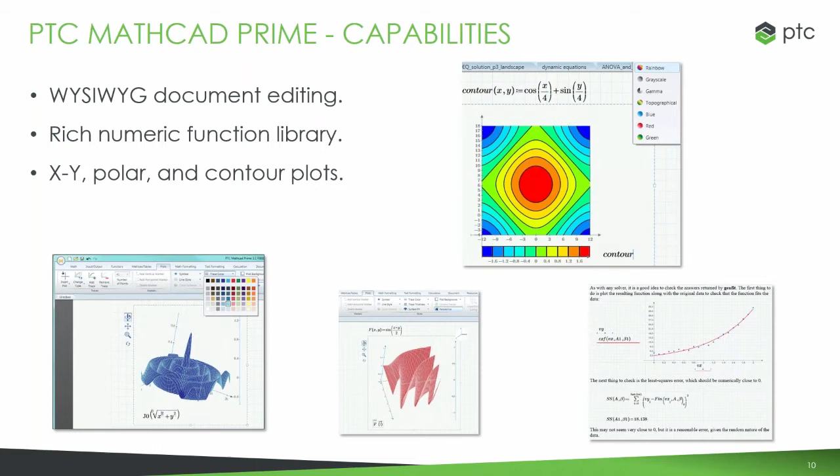Okay, so another huge capability of Mathcad is how it can be integrated with Creo Parametric. That means you can take values from Creo Parametric, so the dimensions, anything you want to bring over, you can push that into Mathcad. And then in Mathcad, you can do some calculations, figure out a different dimension, and then push your new value for a different part of the equipment maybe, or a dimension next to the one you brought over originally. So you can solve out for the new one in Mathcad and push it back into Creo to use for a different dimension.

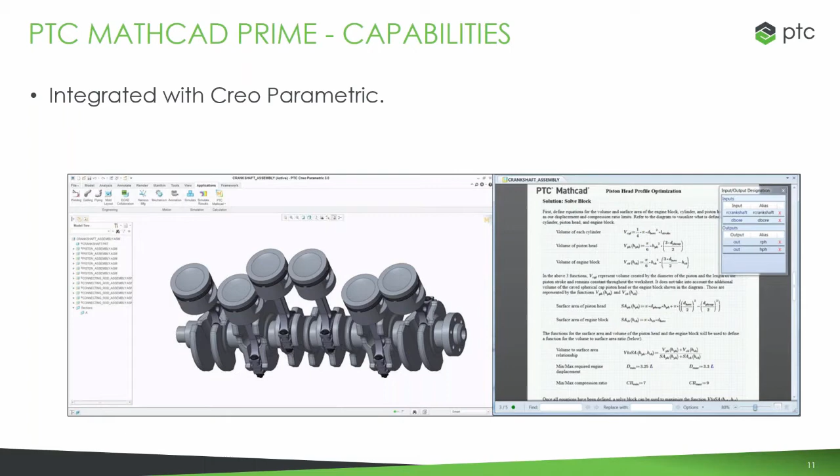And while you're doing all this hard work together in Creo and Mathcad, you can be documenting your design intent. You're not just limited to calculations in Mathcad. It's going to have that strong documenting capability for you, so there will be no confusion about what your intent is. And while you're figuring out what dimensions are looking the best, you can do analysis to make sure that whatever you're doing is going to fit in with your design requirements in the end. So you don't have to wait until the end to do all the calculations to make sure your product is going to fit within your requirements. You can validate and verify while you're walking through it.

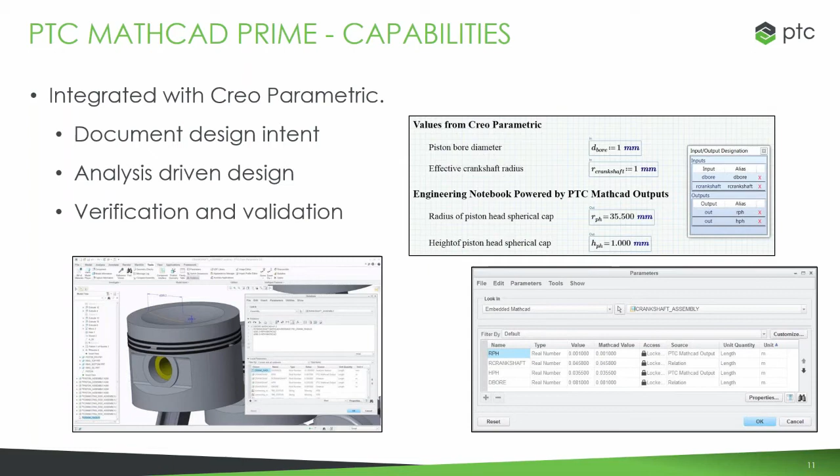Now I'll walk us through a quick demonstration of Mathcad where we are going to look at a couple different ways we can incorporate Excel. I am going to start us off here with a blank one. We'll just look quickly, and I do have one started here. So we're going to be making some updates to this workbook to really show off how Mathcad can help you with your engineering process.

So you see here, it's the same looking ribbon as it looks like in Excel or Word, so we're able to go ahead and update this text to show however we want it to. So we go ahead and bold things. We can toggle off this grid in the background. So we make it whatever standards that you want to upkeep or whatever look you're going for, you can incorporate that.

Okay, so we're going to start off here looking at some beam properties, and this whole document is going to be about this beam deflection. So we're really going to be diving into this beam here. So first, we take a look at the cross-section of the beam. This diagram here was built in PowerPoint. I love making diagrams in PowerPoint. I find it's very easy, simple, something that I do a lot.

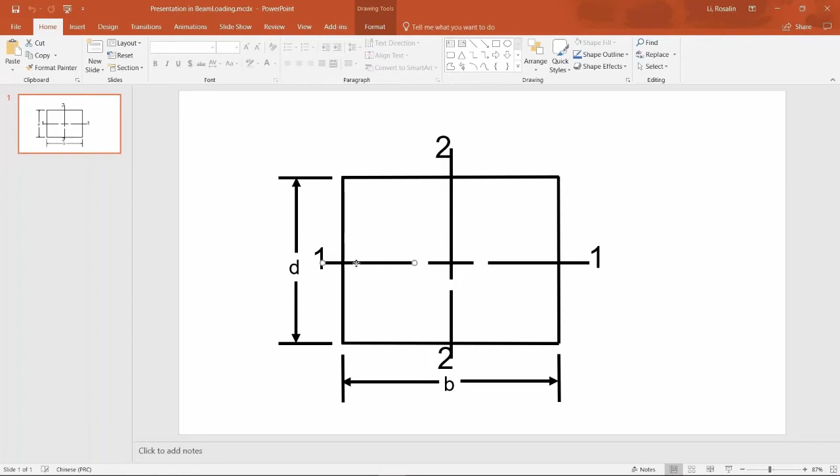So we have this PowerPoint diagram here, and what I can do is double-click on it, and it's going to open PowerPoint for me. So that means I'm not sitting here looking through my computer to find this presentation that I made this diagram in. I'm just double clicking on it in my Mathcad workbook, and it's going to open up automatically for me. So we're going to see this later where I can do the same thing in Excel. So we'll go ahead and make a couple of changes here, change this to a yellow or peaches color.

This is different from the regular diagram in the background, highlighting my cross section here. As you see, I closed out of the PowerPoint and it automatically updated for me. I didn't have to save the PowerPoint then upload Mathcad again, it automatically did that whole process for me.

What I'm going to do now is make a few variables, B and D. As you see, I'm not doing any coding here, I'm just saying B equals and D equals. It's something anyone can sit down and read. And then I'll go ahead and solve out for I here.

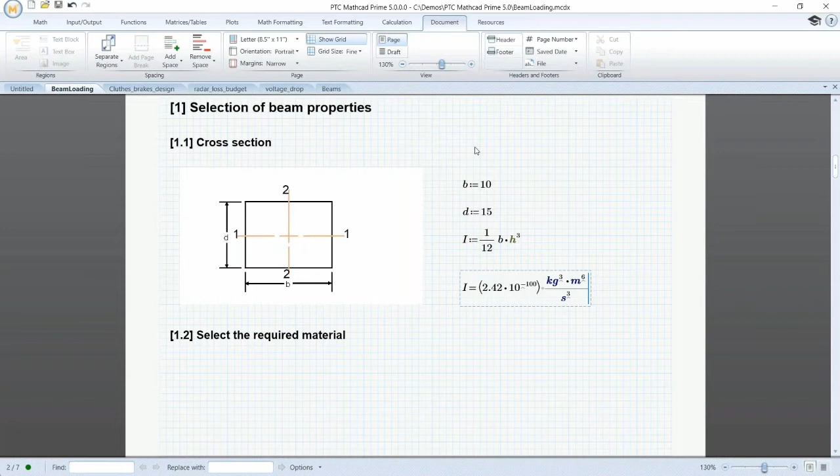Let's say I accidentally type in H, which is not at all the variable I wanted to use. When I go ahead and ask Mathcad what I is, it has all these variables attached to it. I can check myself here since I didn't have any units incorporated yet, so I wonder what did I do wrong here. I can go ahead and ask Mathcad what H is, and see where all these units came from. It's because I accidentally plugged in H, Planck's constant. So that's also showing that Mathcad has a lot of these predefined variables within it as well.

I can go ahead and change H to what I meant to say, D, and Mathcad will automatically update for me. I can also attach some units to B and D, just typing in cm, it knows it's centimeters, and Mathcad will automatically push out meters. I can change that very easily by just changing that M to centimeters, and it'll change the value of I for me, moving the decimal place the correct amount over to whatever the value needs to be now.

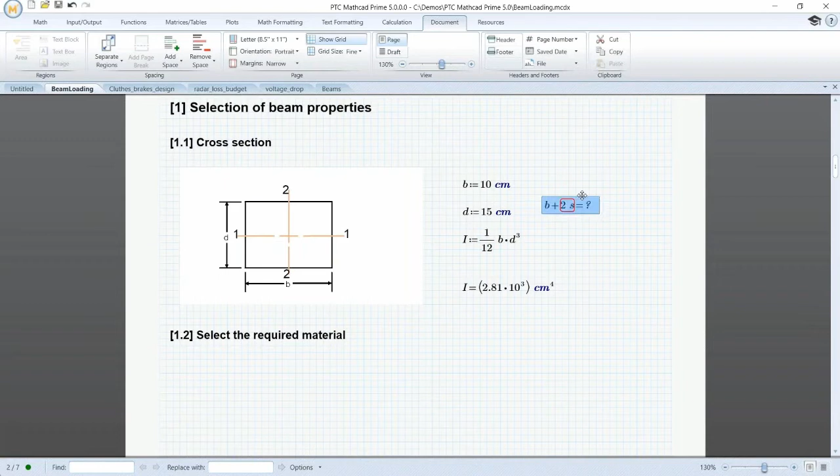What Mathcad also does for me is it won't allow me to add incompatible units. So we see here that I'm trying to add centimeters, the unit of B, to seconds, and it's letting me know that's not possible, maybe you need to go ahead and double check there. So it's going to convert those units for you whenever you're multiplying and dividing, and make sure they're compatible whenever you're doing other operations.

Here we're going to go ahead and read straight into an Excel workbook. There's a lot of work you might have done within Excel workbooks that have all of that data. That's a perfect place to go ahead and dump all of the values you need into a chart that is easily readable, that you don't want to retype within Mathcad. You want to be able to reuse all of those Excel workbooks that you have.

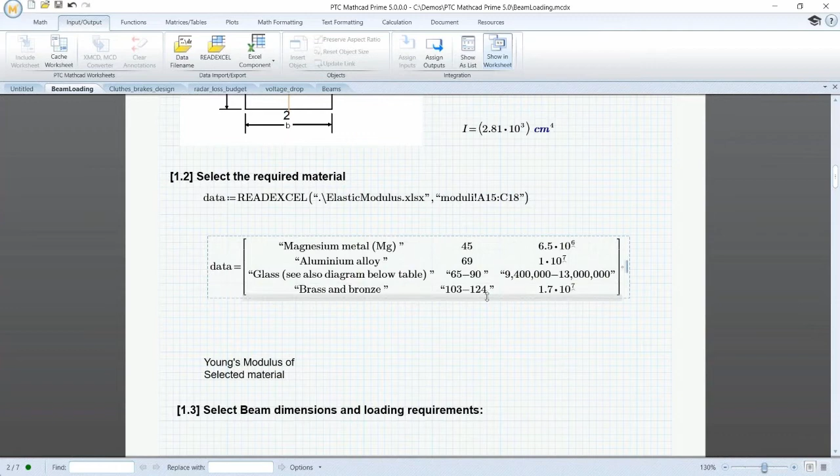So what we can do is a read Excel function, and you see it's big and bright there in the ribbon, easy to find. We can go ahead and pick the rows and columns we want to read into our Mathcad workbook, so we just picked 4 here, of course you could read in much more. Mathcad allows me to set that as a variable, so it's letting me use the Excel data I'm bringing in. It's not just a screen capture or a picture of those Excel values, it's actually reading in and bringing in live those Excel values for me to do calculation work or unit conversions for whatever I want to do.

So again, I set that Excel rows and columns to a variable data, and then I go ahead and ask Mathcad what data is, and it reads me out these 4 rows here. Say I accidentally read in the wrong ones, I can go ahead and update that, and Mathcad will bring in the new rows and columns I told it to. We'll go ahead and do just a quick calculation here where I'm going to use matrix notation to read out one variable, one number, and do a unit conversion with that.

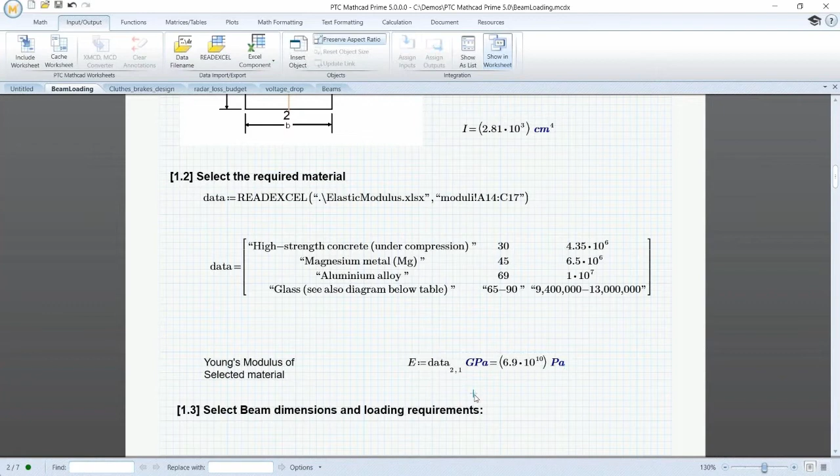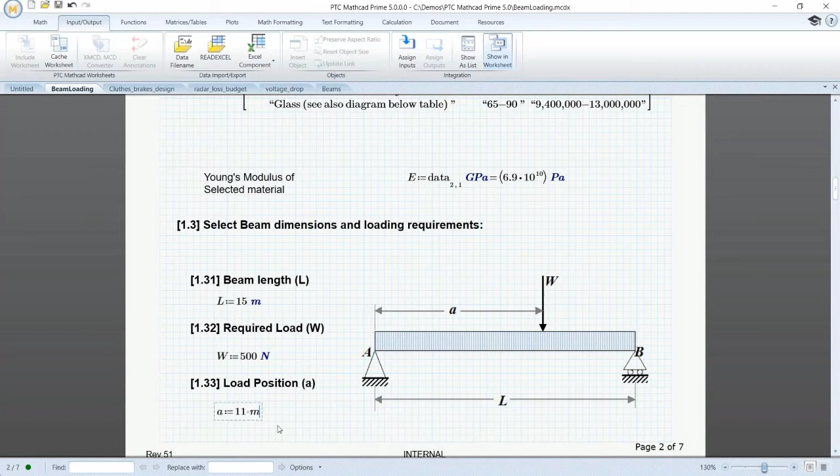What I'm going to do here is define these variables right next to the diagram, so I'm able to have combined diagrams and words right next to the math and setting variables that I need. You're able to have all of this, and you could have made this drawing in PowerPoint as a container where you can go ahead and edit it. But we're combining these diagrams right along with the math that we need.

We can go ahead and do some different calculations, or just some equations set up here with the variables that we set up above.

Okay, so what I'm going to show here is a capability of being able to lock areas. Mathcad has had this capability for a while of making collapsible areas. What's new is that you're able to lock and protect areas.

So we can go ahead and password protect that area. What that means is that people either won't be able to see it if you collapse it, or they won't be able to change anything within that area. So we can make that area password protected, where people will be able to see it, but they won't be able to change it.

That could be really important if you're sending this document out to someone and you want to make sure that they leave one area untouched, that you know for certain this is what you need it to be. Please don't change anything. So you can have that password protected, making sure it's not going to be edited or changed later on.

And then we can go ahead and do a calculation out with those variables we set up earlier right next to that diagram. We can ask what that deflection is at L/2. And again, it pops up in meters. Easy to change into millimeters just by changing that M to mm.

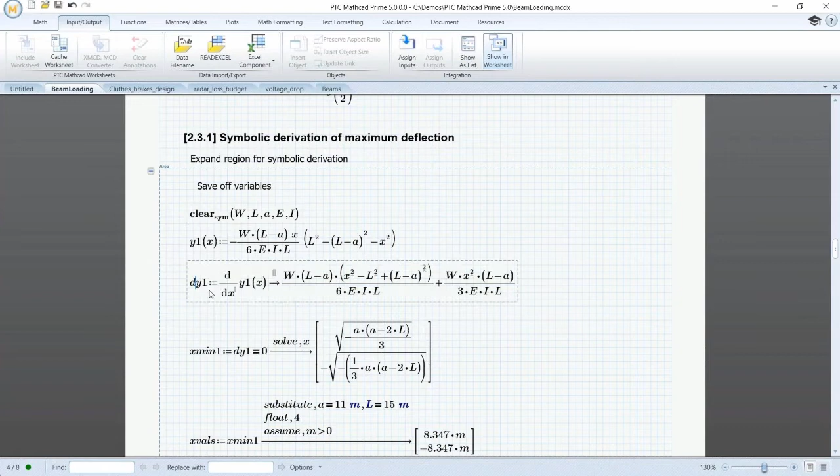And you might not want everyone who you're giving this document to get lost in this derivation. So you can just collapse this area. You can have it visible for anyone who wants to do a deeper dive. But if you don't want someone to get bogged down in those details, you can just collapse it and not have it be a part of your main flow.

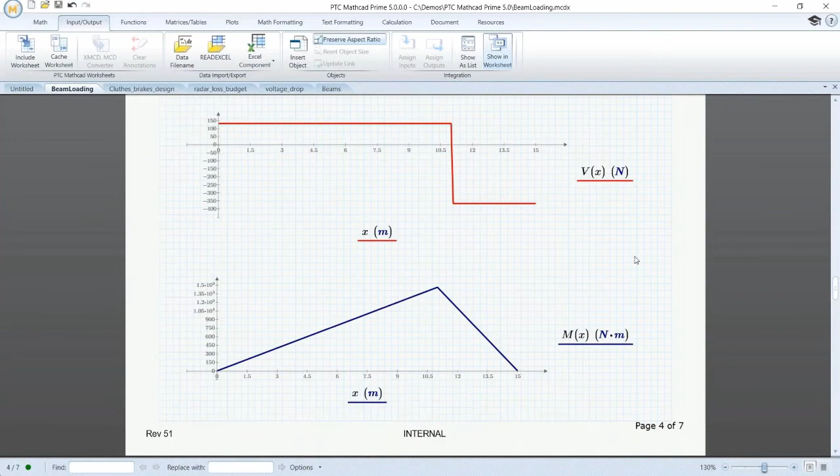Again, we're just going to go ahead and change these units over here, just showing how easy it is to go ahead and convert those, and you're not having to worry about how many decimal places to move it over. All right, so just scrolling through some 2D plots, we'll get into more details on one of those later.

Here is the second way that we can really use Excel. So earlier we took a look at how you can do a read Excel function, which brings in those rows and columns and the values within them live, pulling it in for you to do calculations out with it. This is a way that you can reuse any charts of data that you have.

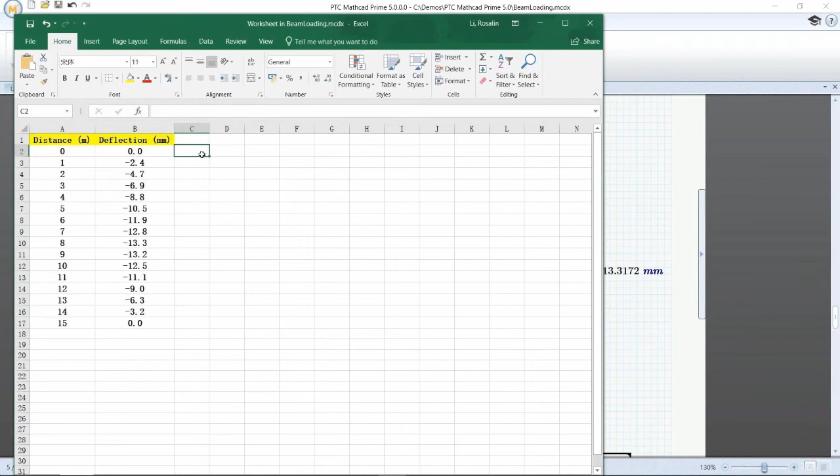So what we can do, this is the same thing we did with PowerPoint earlier, is that we can go ahead and highlight the headings there. We can bold it and center it. And again, we're not searching through our computer to find that Excel document. I don't have to remember when I made it or what folder I put it in. I double click, it opens for me. So that is a perfect way to use Excel.

It's called a container. So I can go ahead and put it in its own container, double click on it, open it up, do all that good editing work that you can do in Excel, and reuse it, reincorporate it into your Mathcad workbook here.

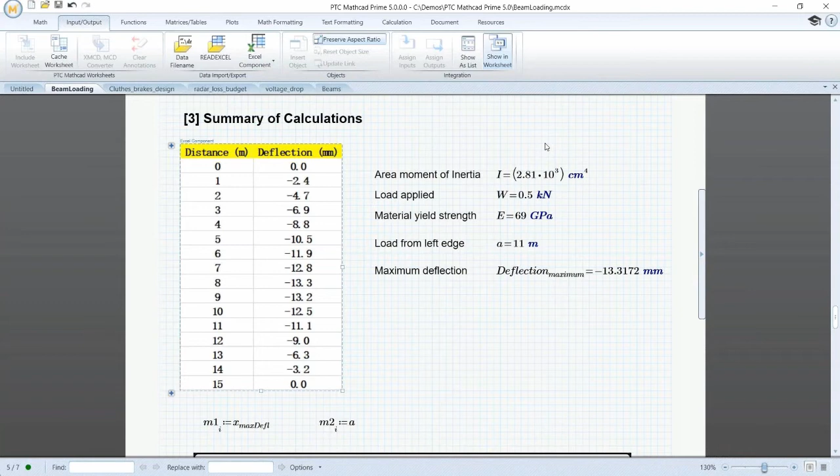Okay, so we went ahead, updated it, closed out Excel, and it automatically updated for me in Mathcad. Again, we have math right next to that component there.

We're going to take a closer look here at 2D graphs. So Excel gives you a lot of options to go ahead and edit your graphs, and now Mathcad can do that as well. We can go ahead and add in a background to really highlight where the chart area is versus where all the axis titles are.

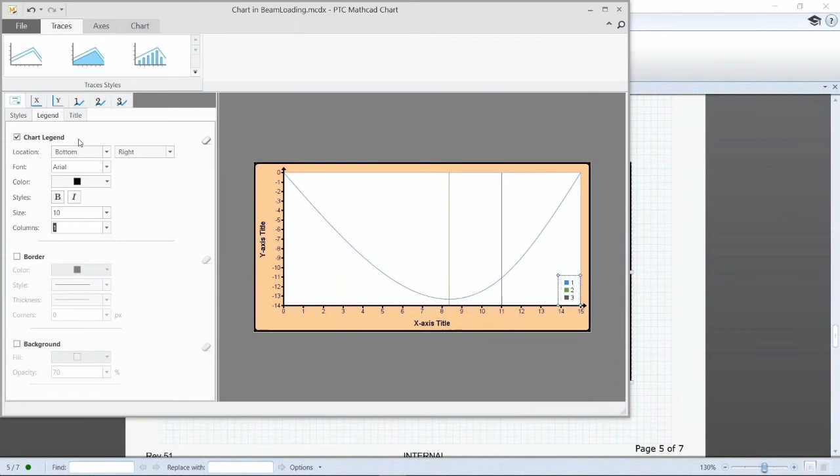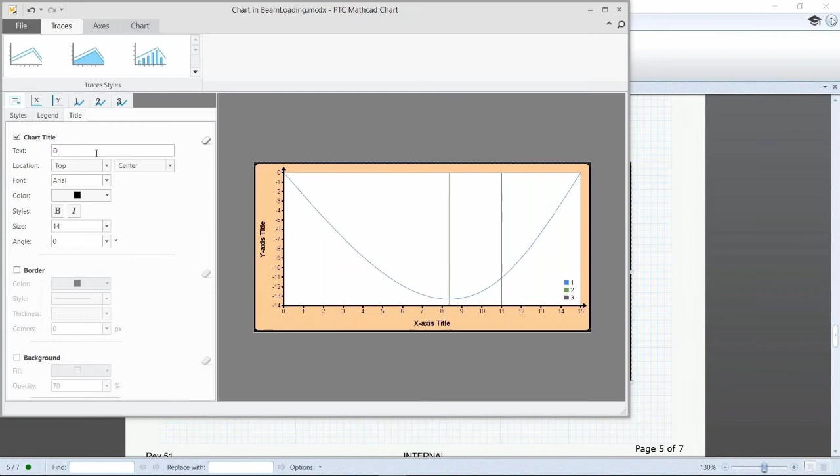And then we can go ahead and add in a legend so we can really understand what this chart is trying to tell us. At the beginning there, we weren't really able to understand the point of this chart. It was just 3 tiny lines, couldn't really follow the point. So as we go ahead and make these formatting changes, we're able to see this graph really come to life, where we're able to understand the point that it's trying to get across.

We can go ahead and bold that title, make it easier to read and understand, and add in the axis titles so we know what it's trying to tell us. At the beginning, we didn't have any of this, so we didn't know the point it was trying to get across.

As I make some more edits here, we're able to really point that out. When I add in the legend, that's important because we wouldn't have known what these green and purple lines were meant for until I define them. We can see the big bold blue line is for deflections, the green line is for the position of maximum deflection, and the purple, which we'll switch to red, shows us the loading position. Fantastic.

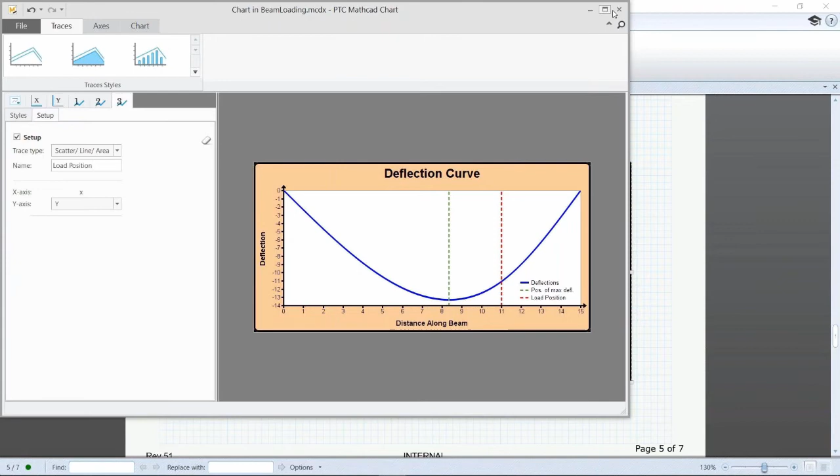So from start to finish, you really show what the difference of formatting means, and that Mathcad has this all in the same window. You double click on it and you're able to see all of the formatting things that you can do, so it's really important. We did that all within Mathcad, able to have it all together.

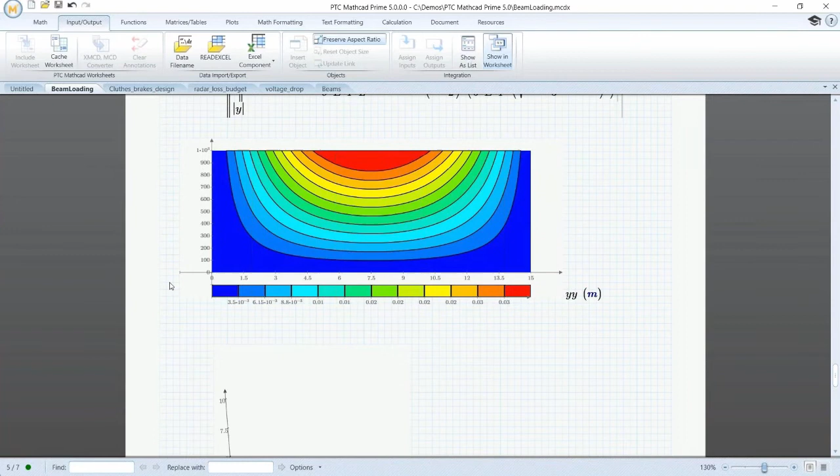A little bit more about some programming that you can do with Mathcad. You can find how that position changes with the load. And then what we're going to do last here is make a 3D plot.

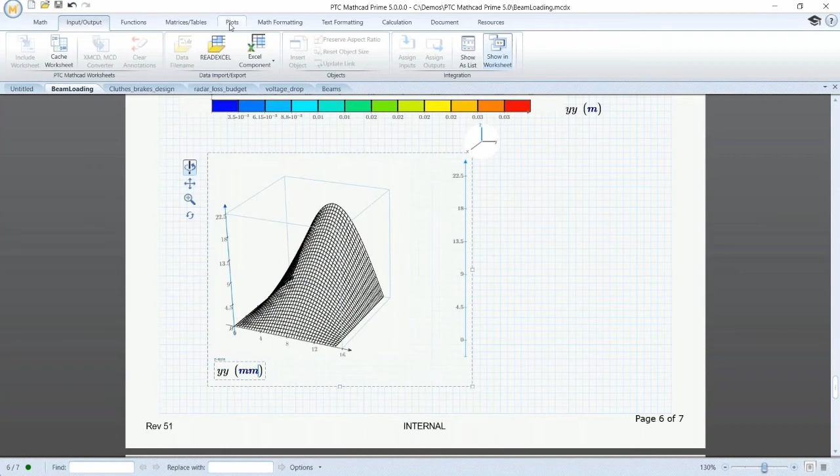When we make this 3D plot, we can go ahead and give it a surface fill, very quick and easy. We can change any of these axes that we want to. This is a live 3D plot where we can zoom down into it, move it around, and interrogate it at different parts if we'd like.

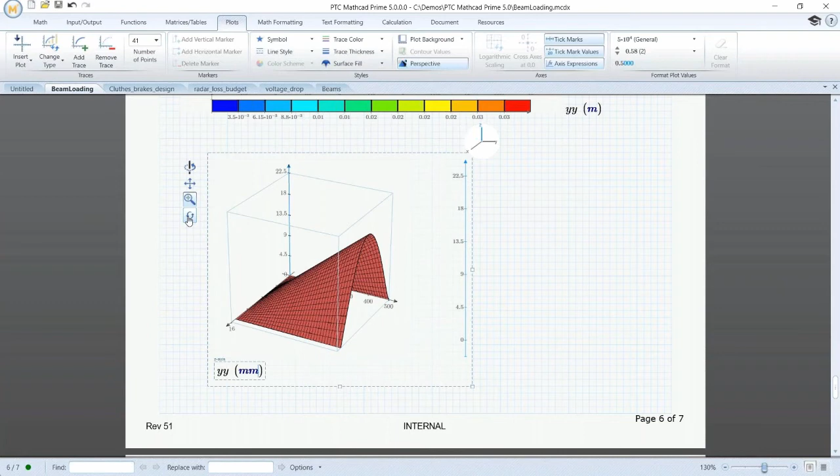Excellent, so that is the demo that I had to show you guys today. Again, we walked through how Mathcad can set up variables, can use Excel either in a container to go ahead and have any charts that you want to incorporate into your workbook.

Just use it as a container there to go ahead and read in those Excel charts to have right in your workbook. Or you can use a READEXCEL function where you can go ahead and bring in those values and do any calculations you'd want to do with it.

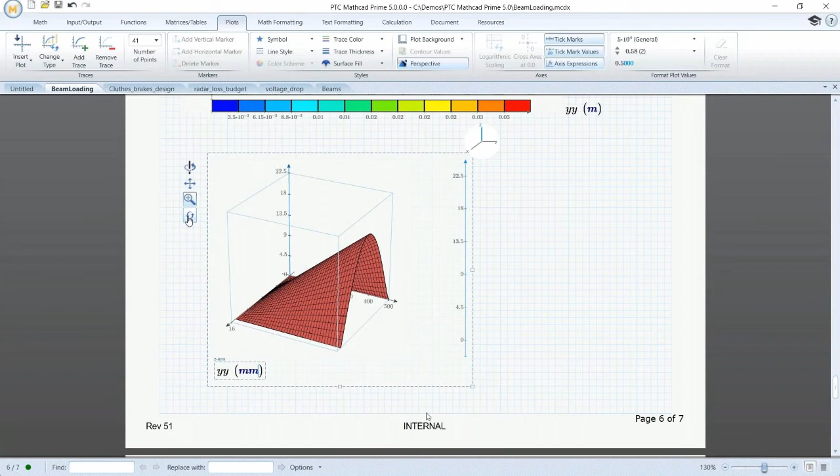So with that, I'll move us back into our PowerPoint here.

I do have just a couple of points I'd like to hit on about what's new in Mathcad Prime. We have performance enhancements that were done in 4, which gave you more capabilities for what you wanted to plot. And then I do have some content protection where we took a look at how you can lock different areas if you don't want people to be able to change or see those areas.

This is important for Excel, where we went ahead and made it easier to incorporate things with third-party apps, where you can make those containers to read those Excel charts straight in there. And now you can also copy and paste multiple regions of your Mathcad straight into Word. We also made it easier to make equation breaks within Mathcad. It has more Windows 10 support and also fixes some critical bugs.

We'll spend a moment here again on each of these. So we have the area content protection. That's really important if you don't want people to be able to change things, if you're going to send this out to different people, maybe different vendors, you want to make sure that your intellectual property is safe.

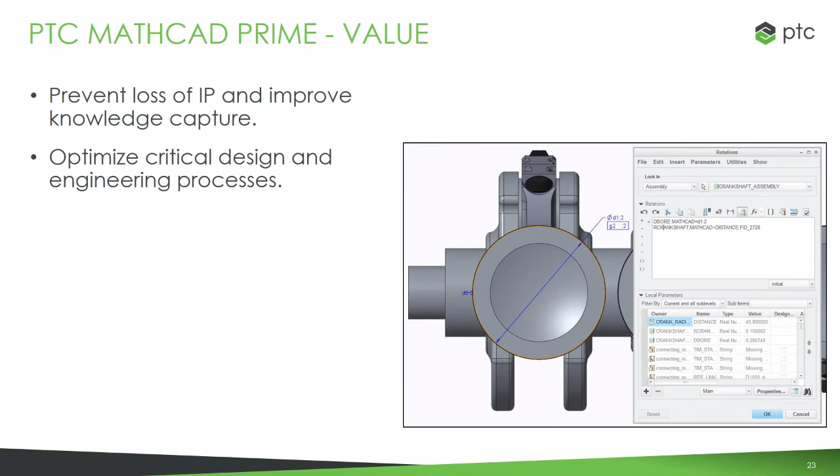And then, as we talked briefly about, in Creo and Mathcad you can optimize your design process by having communication between where you're documenting your design intent and where you're actually doing the design work. You can also improve your product quality if you're using something that checks your units and makes sure everything's compatible, so you won't have millions of dollars of projects burn up in Mars' atmosphere or some other example like that.

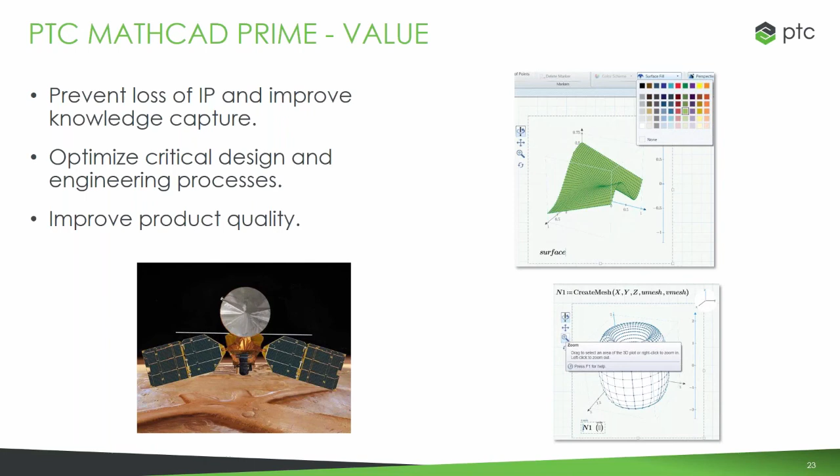You can also speed up your time to market when you have a program like Mathcad doing this work for you, and when you're able to share it with people and they understand it quicker without figuring out a different code language. Also helping speed up time to market is being able to reuse any Excel data you have. You can also improve your compliance with regulations when you have that completed Mathcad workbook you can just send out.